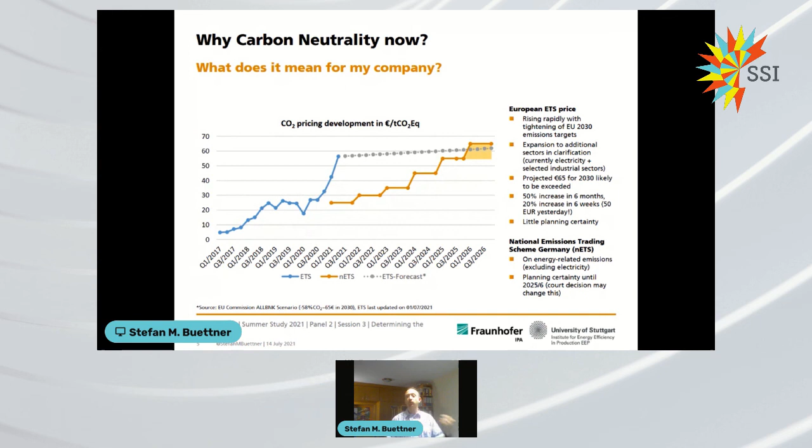Which means that there may be an overshoot in demand, increasing prices. So there are a number of reasons why it's difficult to find the ideal mix and to be quick enough before there are external supply shocks or price shocks.

In order to find out how companies at the moment find their ideal mix of measures, we have applied a methodology consisting of 3 different components. One is in-depth interviews with the companies that we work with on a one-on-one basis to help decarbonize them. Another one is literature review, so scanning announcements from press, media, company press releases, etc.

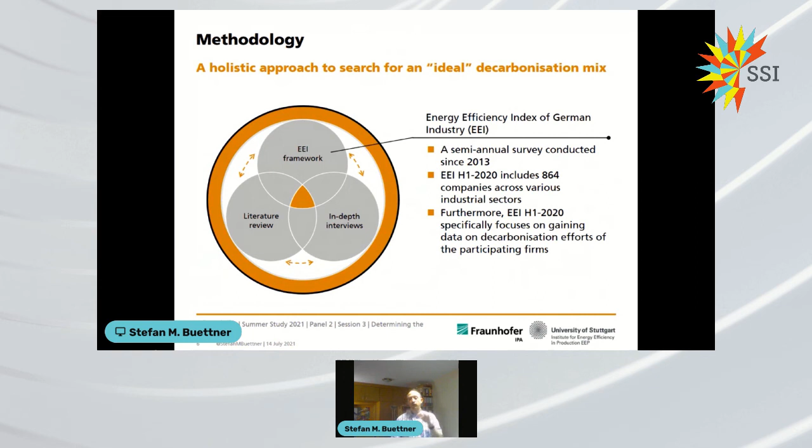And then validate our gut feelings, our experience on the broad basis by putting out a questionnaire to about 1,000 manufacturing companies within Germany, but we'll see later on not only there. On that instance, on that question, we have reached out successfully to 864 companies, and we asked them the question: if you want to be decarbonized, which factors are most decisive in making up your choice?

Is it the level of investment that plays the biggest role? Because things can be rather pricey, and if you don't have enough investment cash on the side or difficulty getting loans, maybe that is a limiting factor.

Or is it the image effects? I want to be seen as a company that moves forward boldly, and therefore has lots of emphasis on things that can be seen and noticed.

Or is it, how do I get it done cheapest per ton of avoided CO2 equivalent? Or maybe it's also the expected productivity increase, and not only energy productivity, productivity overall. But it could also be, the more complex a production is, that technical aspects are the limiting or motivating factor. How complex is it, how deep does it go into my process? Are there risks to disrupt my production? Or is it simply the availability of competent personnel that can help me implement it?

As we assume that the situation differs quite broadly depending on which company size we have to deal with, or how energy intense a company is, or what sector they're in, we cross-referenced this question against a number of different dimensions and also against the dimension of motivation. In that questionnaire we asked lots of other decarbonization-related questions, but these are not the focus of today. The data was gathered in conjunction with a number of partners from within the country, including the German Energy Agency and the Federation of German Industry.

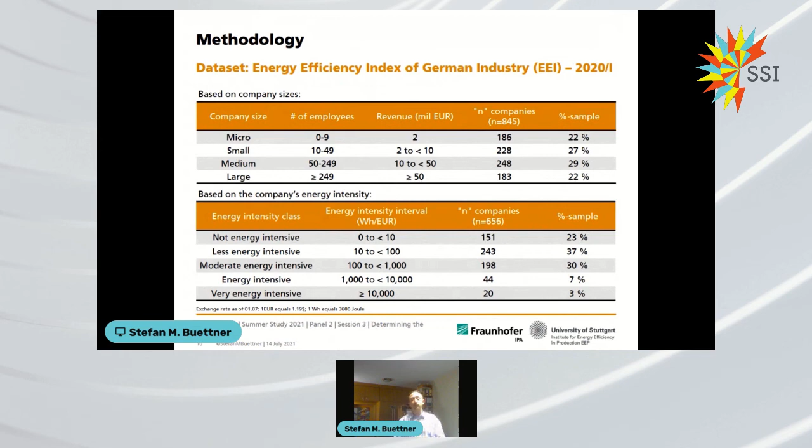Now, looking at the general result for the sample, we notice that surprisingly the soft factors are lagging tremendously behind. So at the top we have the cost factors, the cost per avoided ton of CO2, and the level of investment. Then we have technical aspects, and then the productivity increases.

Now we see 3 colors here, priority 1, 2, and 3. We asked them to name their first priority, their second priority, and then their third priority. They didn't have to give us a second or third, only the first was mandatory. So we looked at what was the number 1 priority, and then also at what was sticking out as secondary or tertiary, and overall as a priority.

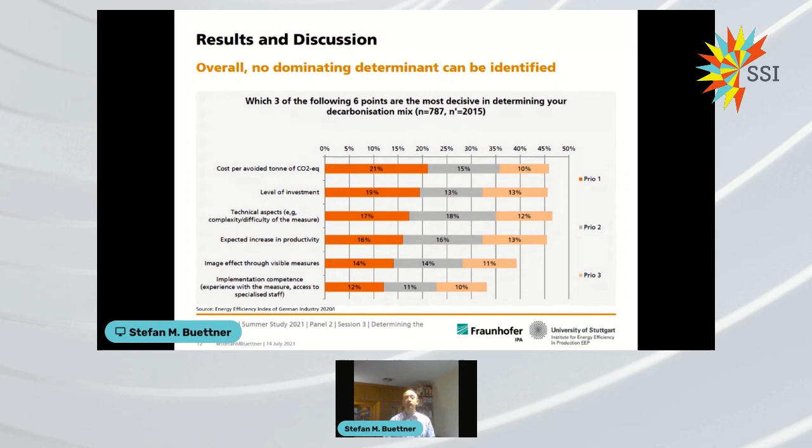We see that even though financial aspects come first as the top priority, productivity and technical aspects come in second place, because that's very important. If it doesn't increase your productivity, should you really do it? Or if it's technically troublesome, would you really want to go into that? However, in overall priority, the first three priorities added up, we see that financial factors, technical aspects, and expected productivity increases are all on the same overall level. Competence appears to be less important because nowadays you can hire that in rather easily.

Looking at this from company size, and because I would otherwise have to combine 6 or 7 charts in one slide, which would be hard to digest, I only illustrate the top 2 listed number 1 priorities and the top 2 listed aggregate priorities. On the left-hand side, under the heading General, you see a recap of the initial slide on the general sample. What sticks out here is that the number 1 and number 2 priorities differ depending on company size.

Surprisingly, the relative avoidance costs are the number 1 first priority for micro companies, even though one would assume those typically have a lower investment budget and therefore more difficulties putting up the upfront cost for an intervention. One would have thought the level of investment would be the issue, not the avoidance cost, as the number 1 thing. We see a similarity between small companies and large companies on the right-hand side, having the same order, but with a couple of percentage points apart from one another.

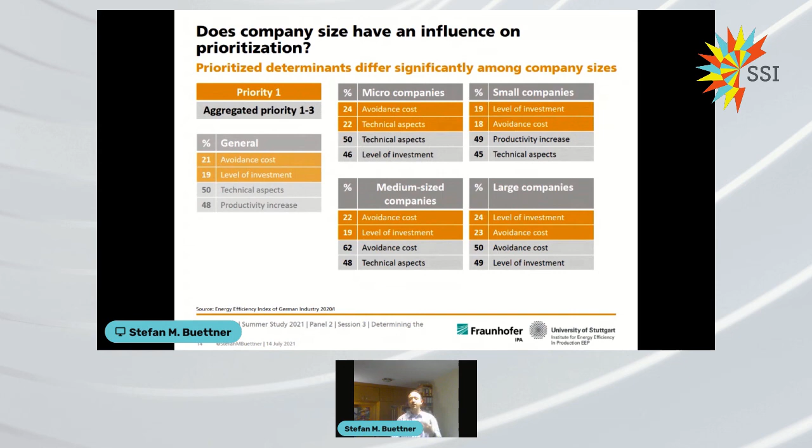Technical aspects are, however, the most important determinant for quite a number of those company sizes when we look at overall importance. So for micro companies, it's nearly half of companies. Also for medium-sized companies it's rather important, but we see they differ largely across the sizes.

Here I pick out this implementation competence element. It's a priority for less than a quarter of companies of the micro size, perhaps because they're just used to hiring in expertise, since they're so tiny that having in-house expertise isn't feasible for them. Also, it may be a consequence of companies thoroughly assessing the technical aspects, where too complex solutions requiring specific competencies are ruled out beforehand.

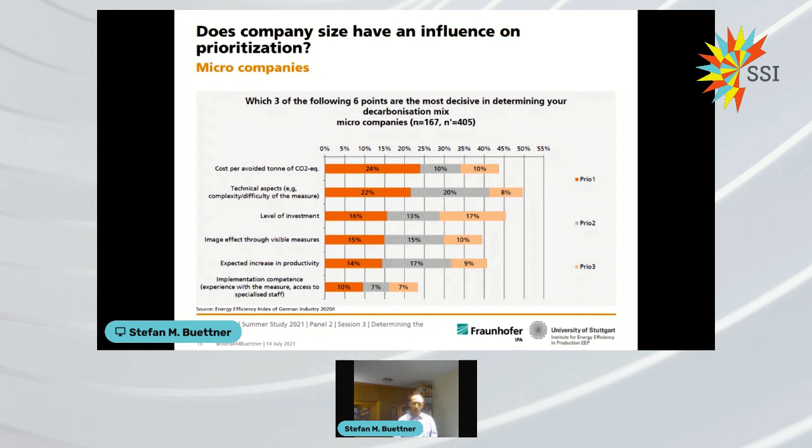Also here we see huge differences, and not surprisingly, it's the energy intensive companies that rank technical aspects first. Imagine a steel process where you'd have to change lots and lots of things to convert it to zero carbon - for example, the traditional process to steel production with green hydrogen.

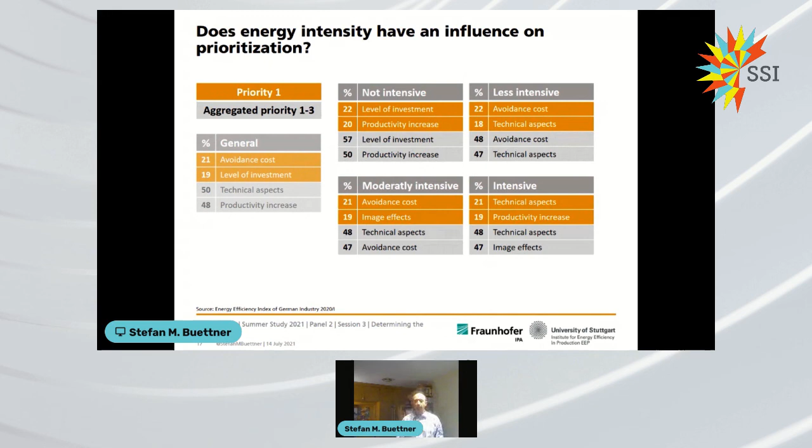Now looking at the different sectors, we classify 27 different manufacturing sectors. Because there are so many, we change the way we present that. On the top in orange, you see the branches or sectors that most often ranked that category as the number 1 priority. In gray, you see those sectors with the biggest aggregate share for this dimension. So the expected increase in productivity is most often the top priority in the food industry, followed by the chemical and chemical products industry, and for that sector it also has the highest overall importance. The chemical industry also has the largest process emissions to deal with, and where the products are rather difficult.

If we look at image, pharmaceutical products and non-metallic mineral product sectors put the highest emphasis on image effects - not the highest within that sector, but across all sectors, they most often mention it as first priority. If you look at overall priority, more than half of companies, again in the pharmaceutical industry, see that as an important factor, followed by the paper and paper product sector.

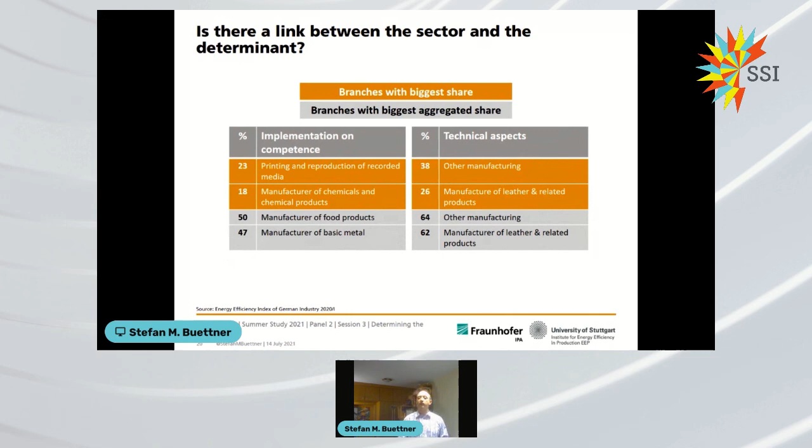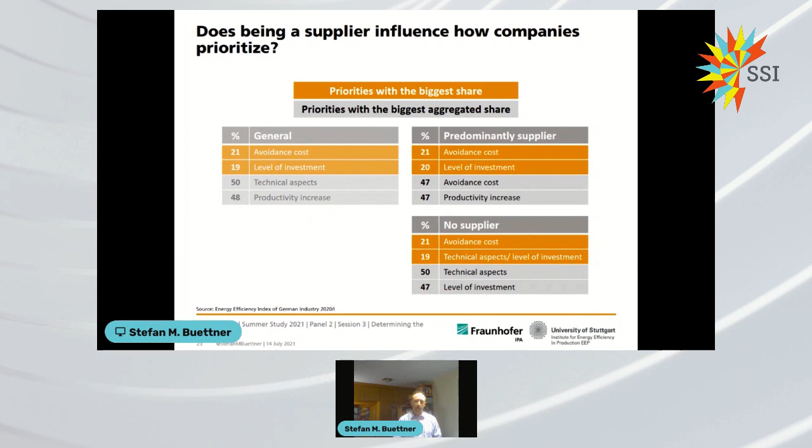When we look at the motivation to decarbonize, there are some surprising results - is it customer requirements, government requirements, or image? There are a number of different dimensions here, and I'll click through rather quickly; you'll get that afterward, I assume. CSR, corporate social responsibility, plays a rather large role. However, it's surprising that relative avoidance costs are the highest factor there, not image. On the other hand, for companies motivated by image, the avoidance costs - how do I get my image cheapest - is the driving force, as we can see here.

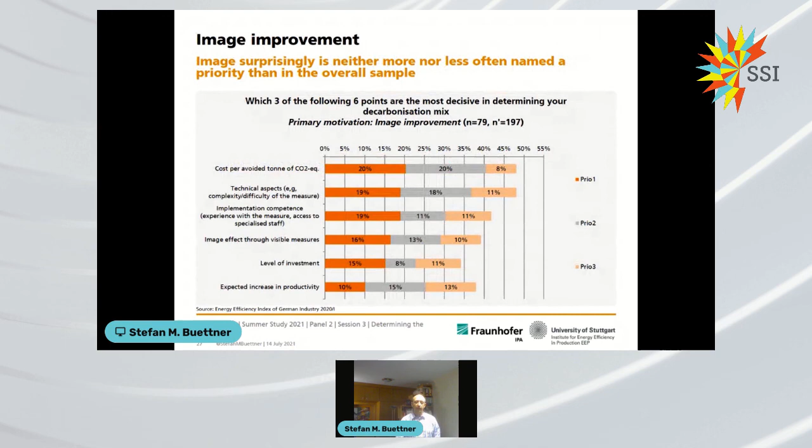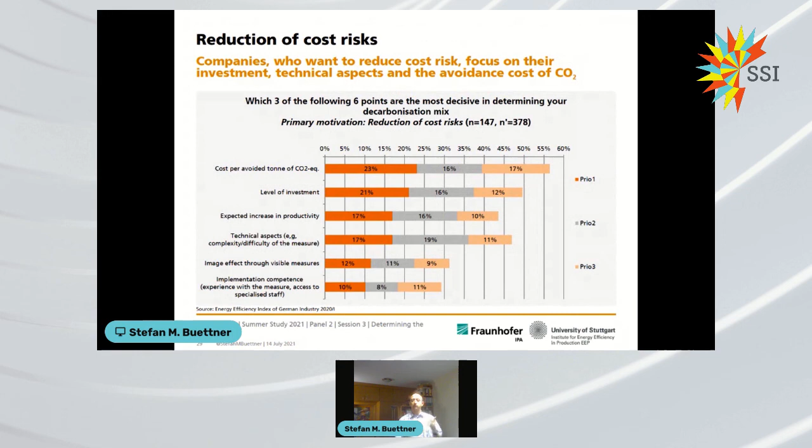That I already said, so the reduction of cost risks is an important thing, as are the long-term economic advantages. So if we summarize all that,

what influences the motivation to decarbonize? The reduction of cost risks is a very important one. Customer requirements are for the level of investment, long-term expectations, productivity increases, and CSR context for image effects. Putting that all together, there are 4 determinants that were most frequently named decisive in determining the mix, which is

the relative costs, level of investment, technical aspects, and expected productivity increases. However, external factors drive that big time. It's the current economy, available financial and stimulus systems, or also the emissions price.

There is no standard package to deliver that. And what also needs to be said, that is a snapshot of the situation in Germany. However, that said, we do capture that data also for other geographies. So the same questions are currently being asked in the US, in Canada, in Mexico, and many other countries. So if you're interested, just go on that link and fill in the questionnaire. Many thanks.

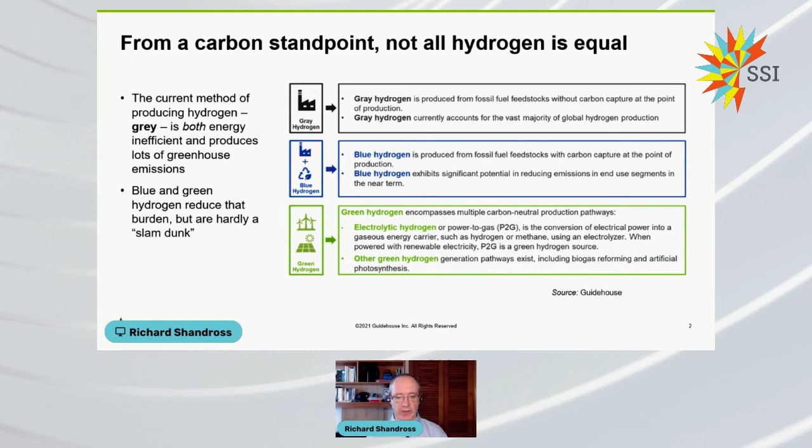So let's take a look at the opportunities for decarbonization that exist within industry right now. This is the US industry data reported by the Manufacturing Energy Consumption Survey that the Energy Information Administration does. The blue shaded areas are electric fuel consumption, and fossil fuel is that rusty color.

You can see that about 60 to 63%, or 62%, of the entire industrial energy usage takes place in boilers and process heating. Much of boilers can be electrified. One issue, which I believe Stefan referenced, is it would require a large increase in electrical capacity. And it's especially hard for retrofits, where you would have to take a good boiler and just replace it with an electric boiler.

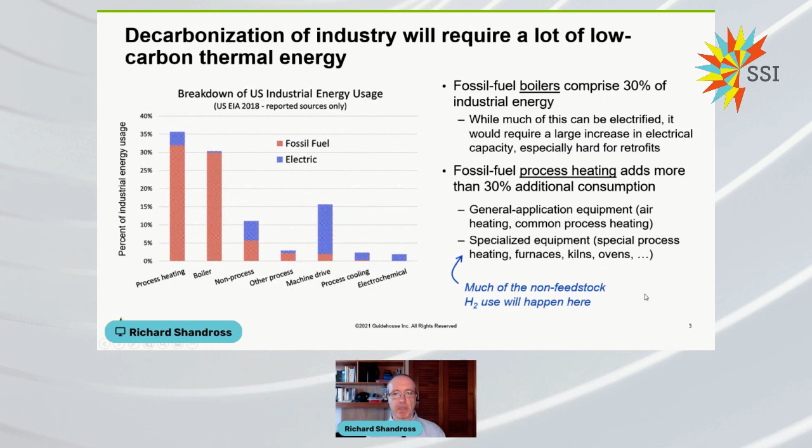On the process heating side, you have more of the hard to electrify kind of fossil fuel usage. You can divide process heating into general application equipment such as air heaters or common types of process heating, and more specialized equipment such as kilns, special process heating that is very customized, furnaces, ovens, and so forth. That's where a lot of the non-feedstock hydrogen use in industry is going to happen, in that high temperature specialized equipment that is hard to electrify.

So what are all the different kinds of use cases for low carbon hydrogen in industry? Hydrogen is already used quite a bit in industry as a feedstock, and if you can green it by introducing low carbon hydrogen, that is a very good start for decarbonization. You can't electrify to replace that hydrogen, and there's no label on the atoms and molecules saying that it's green. So essentially, just greening it adds decarbonization without much competing opportunity.

The other major uses are as a fuel, which is not really much of a use right now, except to some extent, probably a significant extent, in the petrochemical industry, but not much elsewhere. As a process atmosphere, which is really important in things like glass making and especially metals processing, or as a heat transfer medium, which is a much lower volume use. So the real opportunity for new decarbonization and new uses of hydrogen would be as a fuel.

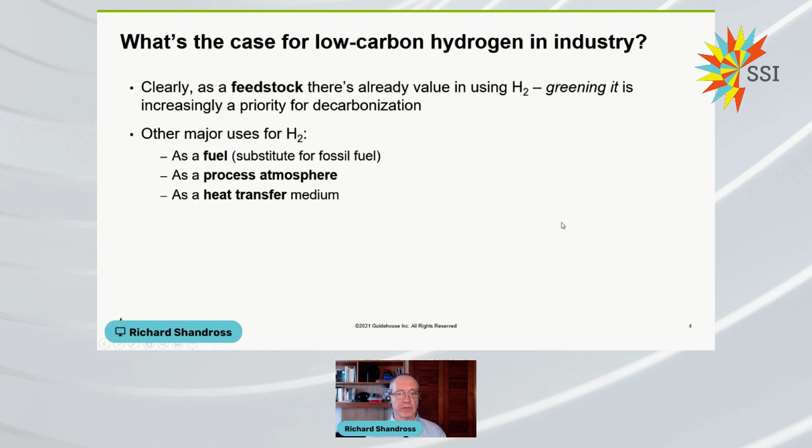So let's talk about molecules versus electrification. There are various pros and cons for each of them. The first one is that if you're producing green hydrogen by a non-bio method, you're using electricity, and there are efficiency losses, conversion losses to get to hydrogen from the water. So the baseline case would be just to use that electricity directly as electrification, and the local efficiency is good as well, because you often have more heat losses in furnaces, ovens, kilns, boilers, and so forth.

For energy storage, batteries are great for short-term, as in a day or less. But when you're talking about medium or long-term, that's where hydrogen, and perhaps other molecules, can have an advantage. In terms of cost, you've got costs involved in equipment, R&D to get equipment to replace existing equipment that is not electrified right now. You've got infrastructure, both for electrification, as I referenced, and also for hydrogen. We'll get into some of that.

In the case of electrification, if you're in a region where peak demand pricing is in effect, unless there's a special industrial version of that, you could have a real problem using so much electricity on that worst day of the year. In terms of compatibility with industrial processes, electrification, at least currently, generally requires low to medium temperatures, and by medium, that could be fairly high, up to 700 or 800 degrees Celsius.

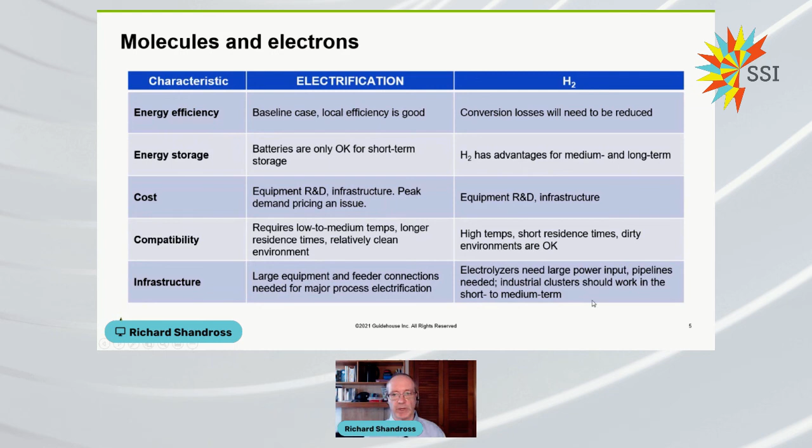In terms of infrastructure, you're talking about potentially large equipment and feeder connections for electrification. That is also true for electrolyzers. If you had on-site electrolyzers, you'd be losing energy in the electrolysis. So pipelines really are the way to get around that, where you have the good infrastructure to begin with: you produce the hydrogen, then pipe it elsewhere. In the meantime, industrial clusters were a sort of local centralized source of hydrogen.

I'm looking at the time. I'm already taking up a bunch of time here, so I'm going to not go through all of these, but there are a lot of technical challenges to getting to some of these high temperature industrial processes that use hydrogen instead of natural gas.

The reference point you should use is natural gas as opposed to electrification. When you compare heat transfer from a hydrogen flame versus a natural gas flame, you've got much less radiation from a hydrogen flame. So there has to be methods to increase that, or to reduce the need to transfer heat by radiative heat. You've got a higher temperature in your flame, so NOx emissions are higher.

That is an issue and something that needs to be accommodated. Possibly, if you were burning pure oxygen, if you needed really high temperatures and flame intensity, burning with oxygen, then that's not so much of a factor.

The burning and combustion characteristics for hydrogen are very different than natural gas. So the burners have to be designed appropriately, and the control systems and gas flow systems have to be designed appropriately. What you're ending up with is a much wetter flue gas, which may, if there's contact with the product, create issues - having a much wetter gas, as well as wetness in the combustion chamber and exhaust gas, which can create issues there.

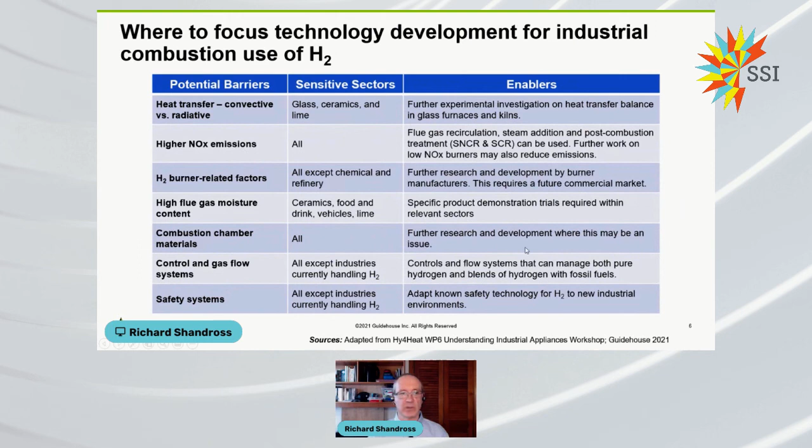All this is being researched for some industries and will be researched for others. Glass is one that's starting to make progress on its own volition. And safety systems - obviously we know hydrogen has its own safety issues that are different from natural gas, and they're important.

Producing green hydrogen via electrolysis does have energy efficiency implications, but I should point out that for thermal applications, they're less than what people currently are thinking. Part of the reason is because when you're thinking of the energy content of your gas in a combustion application, you're looking at the higher heating value, as opposed to the lower heating value, which is what you think about for power applications.

Current modern day electrolyzers can reach pretty high efficiency - just at the electrolysis, you can get to 93% higher heating value. Now there's also other balance of plant, like power rectification, and you may need power rectification and electrification in certain industrial processes as well. Where you're really going to get a big ding is if you need compressed hydrogen, because that can use a really significant amount of additional energy.

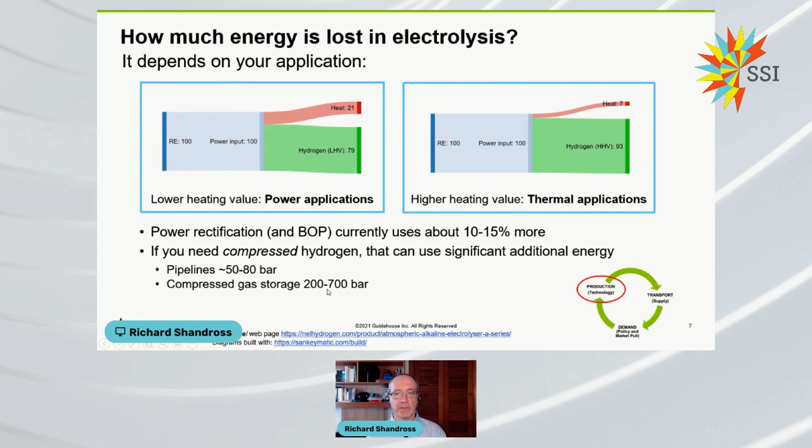Some of that energy you need if you're going to do pipelines. If you're going to be storing on site, you need to really compress it quite a bit, and you can lose a lot of energy.

Yet costly, especially if you're going to try to capture all the carbon. Electrolysis, as I mentioned, in terms of efficiency and so forth. The energy costs of compression and liquefaction are not negligible. Transport - there are not too many hydrogen pipelines, only in certain places. It's possible to do some gas blending, but that has its own issues. I'll be talking about that in a slide or two.

Then there's the question of storing it on site, if you don't have hydrogen pipelines sufficient to give you a constant stream, or if you're trying to store it long-term - a lot of the above-ground storage options are not terrific. So geological storage is a question, and that needs a lot more research and development for certain kinds of storage. You may not have the underground formations in your area that are known to be good, but you may have some that might work, and there needs to be further research.

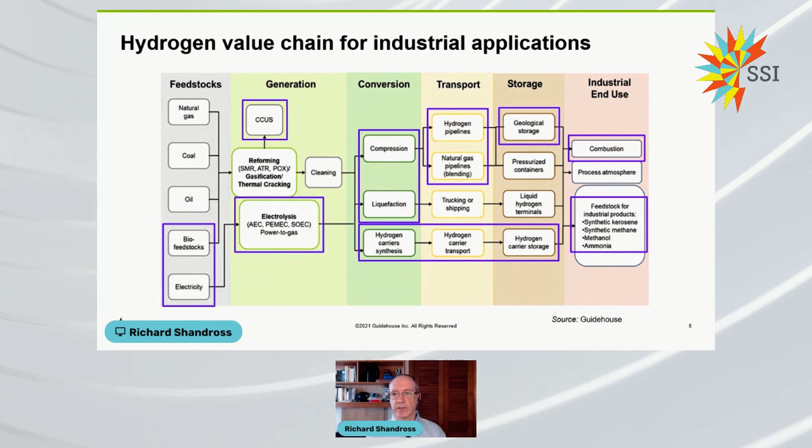The devices involved in doing the combustion need to be developed to be compatible with hydrogen or blends. And then finally, if you're going to make industrial synthetic products, you need to get those low cost and highly efficient, and in some cases you might need them distributed to make it make most sense in terms of where the renewable energy resources are.

So with all this stuff, there are some barriers, challenges, if you will. What we believe is going to happen, hydrogen is not the answer to everything. Nobody is thinking that, or very few people are thinking that. And if anybody in the audience is thinking it, really it's got its place. It's going to be side by side with electrification, methanation, energy carriers, and all sorts of other things.

But in order to ameliorate some of these challenges that I've talked about, we're proposing that there's a virtuous cycle involved. And as you go around this circle more and more, the difficulties are going to get less and less.

Right now, there's not a lot of demand for green hydrogen. As there's more demand, there'll be more incentivization of all parts of the value chain to get more efficient, to get more cost effective. It might be, and as Stefan mentioned, in Europe it's already happening, that you need policy drivers and incentives such as a cost of carbon in order to really get that demand up. That may be what it takes.

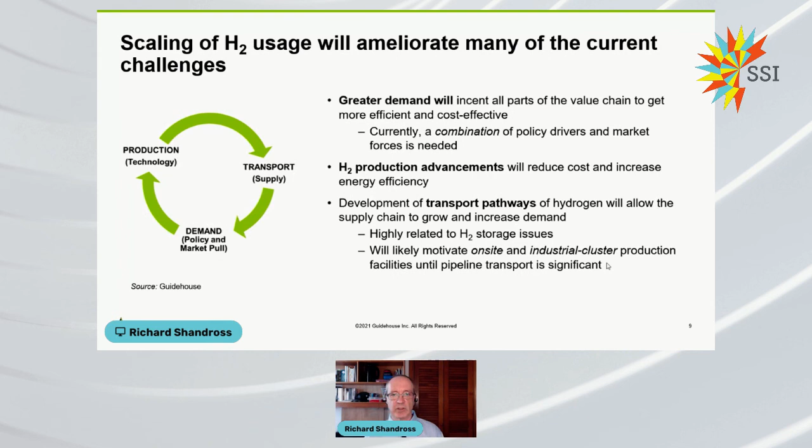And you have to get those transport pathways. That will be a big bottleneck. If you have to truck it, it's a very low energy density on a volumetric basis. So you need pipelines and so forth. In the meantime, there will probably be some on-site and industrial cluster production that is a starter for it.

So here's the challenge with storage. Basically, on a volumetric basis, hydrogen is a light molecule. It doesn't have many kilograms per cubic meter under normal standard conditions, so you have to really compress it to 200 bar, and then you'd get 13.3 times the volume for a given energy density compared to diesel fuel. If you convert it to ammonia, you're only talking about 60% more than diesel. Then there are other storage methods: liquefaction storage and metal hydrides, and conversions into other energy carriers. Because of this, for large amounts of hydrogen, geological storage seems to be the most feasible avenue for large-scale storage.

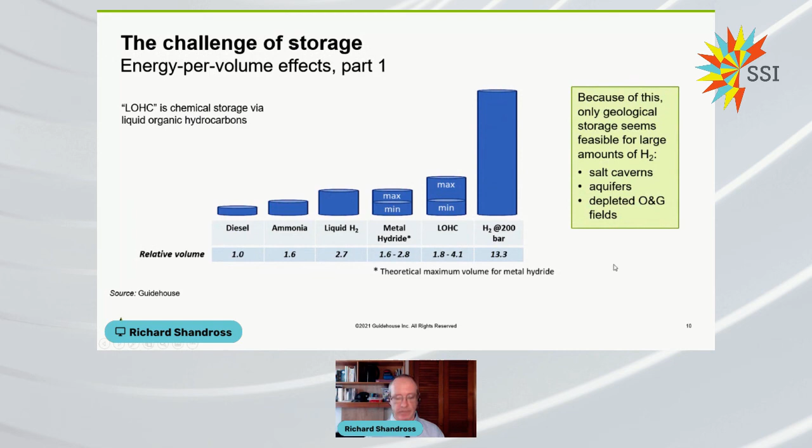So if you're not going to store it and you need to get it to your industrial site, ideally you'd want to send it via pipelines. Tube trucks and so forth are not going to be great except for small uses, like maybe atmospheres in a small plant or something like that.

There are two basic options: you can blend it with natural gas into existing pipelines, or you can do something so that you can put pure hydrogen in the pipelines, either upgrading existing pipelines or creating new pipelines for pure hydrogen. Hydrogen can be blended with natural gas into existing pipelines with not much equipment modification at all, but the problem is it also has a minimal impact on decarbonization. I should also mention that for those who want pure hydrogen on the other end, there are technologies being developed to purify it via membranes on the offtake side.

So you can transport it and have it as pure hydrogen or close to pure hydrogen on the offtake side. The greater your concentration of hydrogen with natural gas, the more you need accommodations to the existing gas network.

You've got compressors, some of which don't exist for large volumes, and in any case have to be retrofit for smaller volumes. You've got to deal with leaks. It's a leakier gas because of its diffusion, embrittlement of the pipelines, different safety issues, cost, and so forth. And you have to pressurize it more because per unit volume, you're delivering less energy.

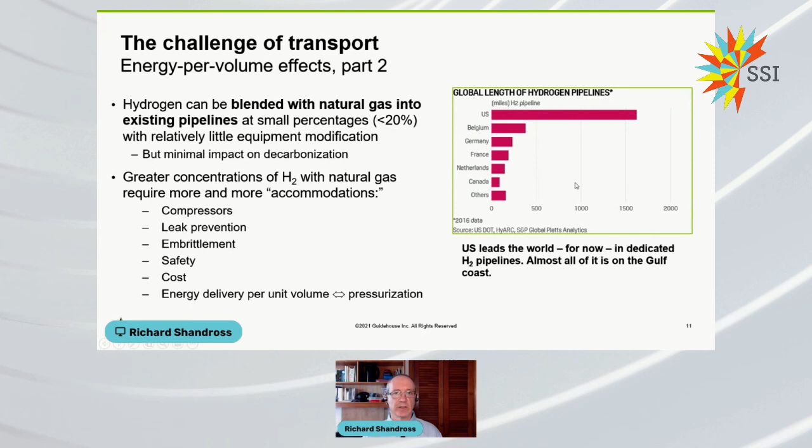And that's not going to be the case much in the future, because in Europe, the gas networks, and Guidehouse has been working with these gas networks in terms of helping to develop this vision and do analyses and produce the reports on it. In Europe, they realized this problem with being able to get the hydrogen to the various places people are going to want to use it.

So something like 25,000 miles by 2040 are envisioned with this consortium of gas network providers, both repurposed pipelines, which would be about two-thirds of the capacity, and then newly constructed ones. I think in Europe there's a lot of the smaller kind, much less so in the United States, but the average size of the pipes are going to be increased as well.

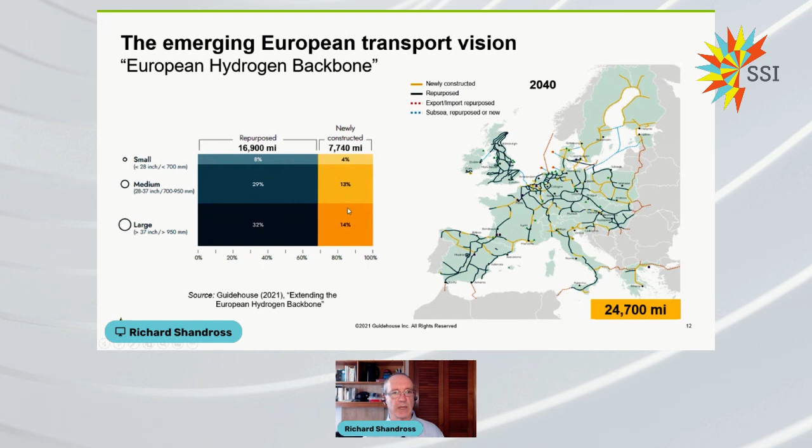So this is a vision for the future going to 2040 and beyond. On the production side in Europe, we're talking about a lot of electrolyzer plant steel that's going in the ground over the next 5 to 10 years. We're not even talking 10 to 20 years. We're talking very quickly, like 10 million tons per year to be produced by 2030, 1 million tons of hydrogen per year by 2024. Many large projects over 100 megawatts electrical into the electrolyzer have been announced.

Just in Germany and Netherlands, we're talking about a total of 87 different projects. They're not all electrolyzers, but pipeline and electrolyzer in combination, quite a few projects, big names in the chemical and utilities industry. And you can see here where all the electrolyzers going in the steel is going in the ground.

Okay, so let's say we talk about the capital, that you can transport it, you don't have to store it so much, or you have big salt caverns or something like that to store it, and the prices of the capital equipment for electrolysis are going to go down. But what does that mean in terms of the cost of hydrogen?

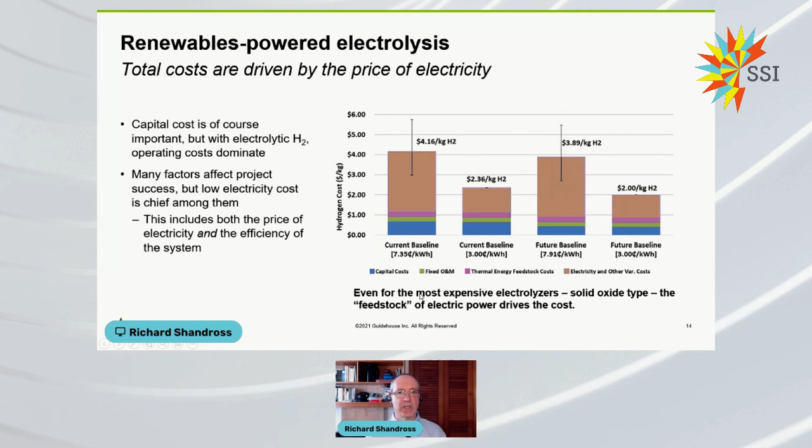So anything that increases efficiency, anything that reduces the price of electricity, having a price on carbon, again, is probably going to be a key factor as well. There are other factors that would make hydrogen strategically better for specific sites, including the need to store energy on local sites, the need or the ability to produce synthetic chemicals with what you're making. There's a lot of things where you can get more value out of it than just what you would get by burning it. So it's not that no hydrogen will be used at these higher prices, but we really want to get it down to much less than what it is right now.

So looking at the whole virtuous cycle, what is happening when you look at the whole picture, big initiatives to reduce the price. HyDeal in Los Angeles is trying to get the price of green hydrogen down to $1.50 per kilogram by 2030. A new initiative, the federal Earthshot initiative, to get the price of hydrogen down to $1 a kilogram. So these things will help to increase demand.

There's research and development being done for large vehicles, for various industries such as glass making, even potentially cement kilns or pre-calciners in cement kiln areas, metal heat treating like crazy. So the demand work is starting and is being done on that side.

And then on the transportation and production side, you've got a lot of steel going in the ground, a lot of pipes planned and so forth. So at least in Europe, we're seeing this is really going to reach a critical mass. And there's no reason to think that once things are worked out and the technologies are worked out to be really competitive with electrolysis, really cost effective and so forth, that wouldn't get transferred over to the United States.

As I mentioned, some cost reduction and demand initiatives are already taking place in the United States. So the basic punchline really to the whole thing is it's not here yet. It's a piece of the puzzle, but I think people need to start taking it seriously and start paying attention really to the development within your own industry or any industry that you're concerned with. And that's basically it. I look forward to hearing your questions after all the presentations.

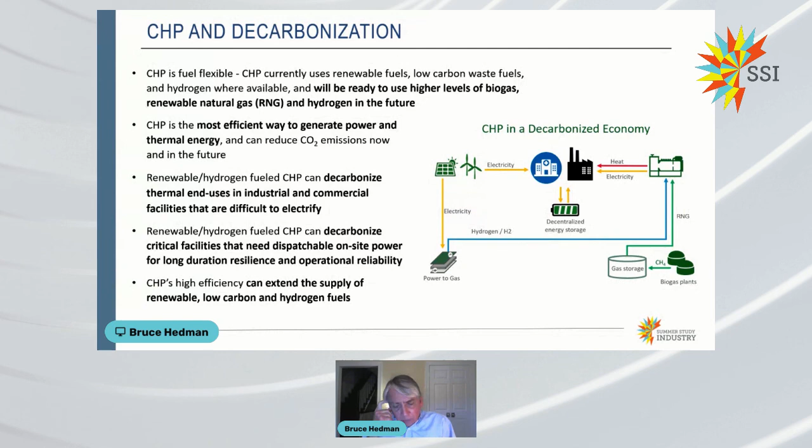Finally, we believe that CHP's high efficiency can extend the supply of renewable and low carbon fuels such as hydrogen, which will be initially limited in availability and expensive. So my next 10 slides or so are really just to highlight a couple points that support these conclusions, I hope. First, I'm going to start with, to set the stage, the role of CHP in the US today.

There's just shy of 81 gigawatts of existing CHP currently installed at more than 4,600 facilities. 82% of this existing CHP is in industrial applications. The 81 gigawatts represent about 7% of total US generating capacity. And we estimate it currently saves about 1.7 quads of fuel and over 200 million tons of CO2 annually.

As I just mentioned, CHP is fuel flexible. While the bulk of current CHP capacity is fueled by natural gas, 72%, there's significant use of non-fossil fuels such as biomass, biogas, municipal and process waste, where they are available and cost effective. In fact, over the last 10 years, 25% of the installed CHP capacity has been in zero carbon fuels, not fossil fuels.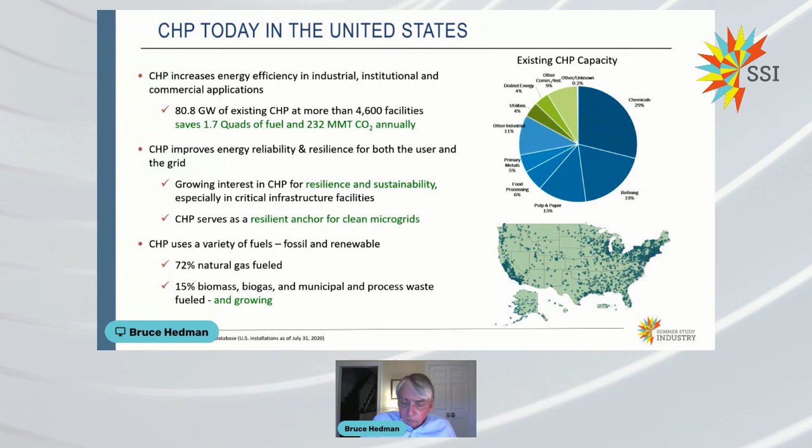Just to follow up on fuel flexibility, if you look at CHP in the industrial sector—and this is a broad definition of industry, it includes manufacturing, agriculture, mining, oil and gas, water treatment, things like that—currently 15% of existing industrial capacity is fueled by non-fossil fuels, such as biomass, biogas, and waste heat, driven again by availability and reasonable price, including cleanup.

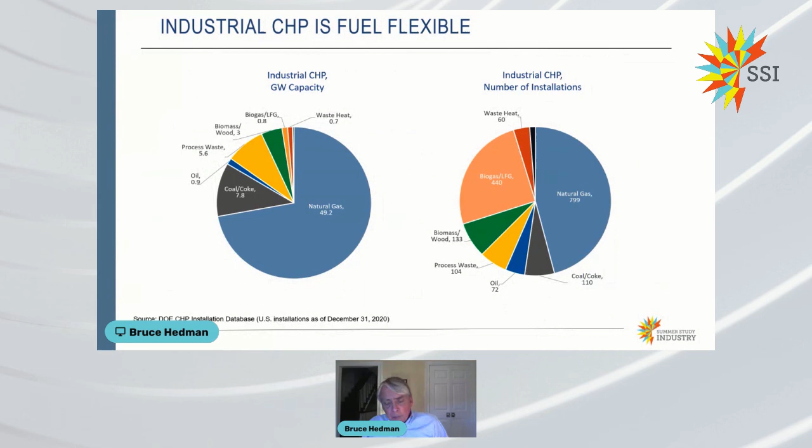But note that this 15% of non-fossil capacity actually represents 44% of the number of existing industrial CHP installations. There's about 1,700, I believe, that are out there. So there's an enormous track record and experience base for operating CHP on renewable and other non-fossil fuels by both industrial end users and by CHP suppliers. I think that's an important item to remember.

I mentioned earlier that CHP is the most efficient way to generate power and thermal energy, and as such it does provide significant CO2 emissions reductions and fuel savings today. We believe it will in the future too, wherever marginal grid generation is based on a combustion technology, whether that marginal fuel is natural gas, biogas, or some carbon zero fuel such as green hydrogen.

Don't worry, I'm not going to go through all the numbers here. You can review the details when the slides are posted—it'll also have my contact information. I'd be happy to discuss the details with anyone offline.

It's based on assuming a 90% load factor and typical electric and steam output for a CHP system of this size. That's pretty typical of an industrial CHP system.

The steam from the CHP system displaces an 80% efficient natural gas boiler and displaces marginal grid generation, which in this case is estimated using EPA's 2019 National Uniform Energy Efficiency Factor from the AVERT system, meant to be a first-cut estimate of marginal grid emissions. You can do it either on a national basis or a regional basis.

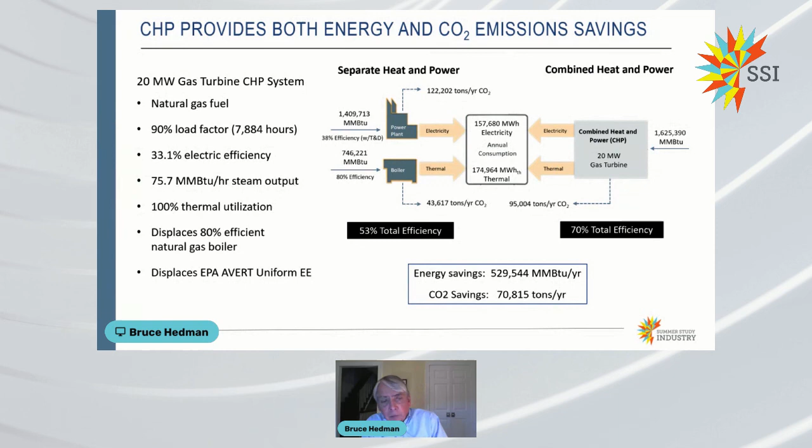It's on the order of, and actually a little bit larger than, the annual CO2 savings from renewable technologies such as solar PV and wind. The reason for this is the high annual capacity factor of CHP.

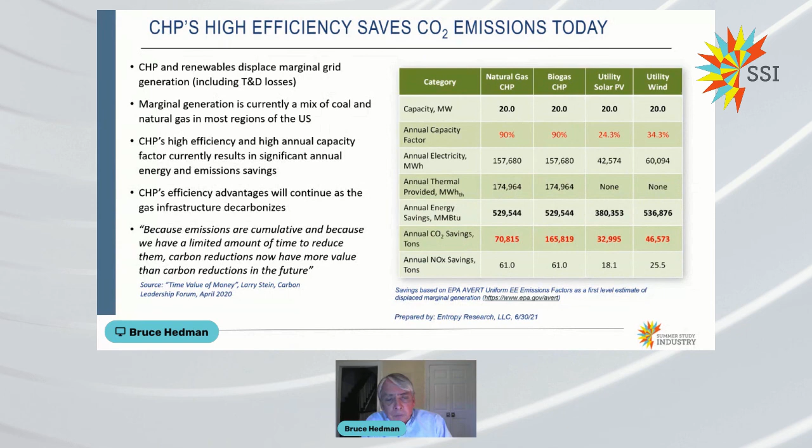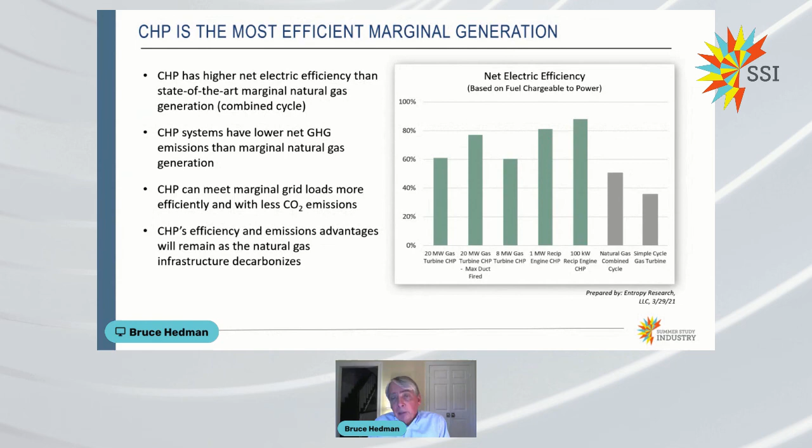Another demonstration of this is that we included in our paper a look at how, while economy-wide electrification and decarbonization of electric generation is being pursued aggressively in many states and cities, fossil fuels and natural gas specifically are likely to remain the marginal generation resource for the near and midterm, and may be necessary over the longer term in some regions to support the greater integration of renewable resources and provide grid regulation services.

I think how much and whether these kind of combustion marginal resources will be natural gas, hydrogen, or renewable natural gas certainly is in question, and we'll see where that goes.

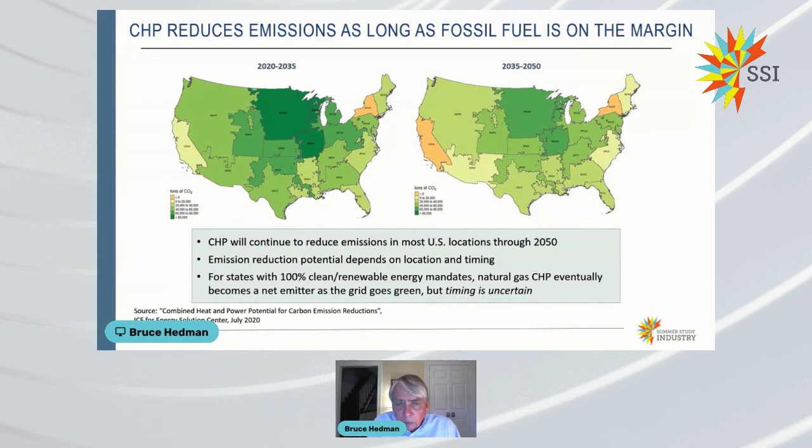So personally, I don't think putting in natural gas CHP today is the road to a stranded asset. It will continue to save emissions for a long time, as long as natural gas is on the margin at the grid. And then hearkening back to what Richard was talking about, there is a path to no-carbon CHP through hydrogen, and that really is this slide.

So natural gas CHP can be a tool to produce significant CO2 reductions in the near to midterm. And the question does remain, what's the long-term role of CHP in decarbonization?

Again, we think there is a key role moving forward, particularly in using low to no carbon fuels such as hydrogen to produce efficient, reliable energy services to markets and processes that don't lend themselves easily or cost-effectively to electrification.

And we feel that these are all paths to the use of CHP as a long-term solution to decarbonization. Current CHP projects routinely operate on biogas and hydrogen blends, and all major gas turbine and engine manufacturers are introducing 100% hydrogen capability systems, many looking at 2030 as the point for commercial availability.

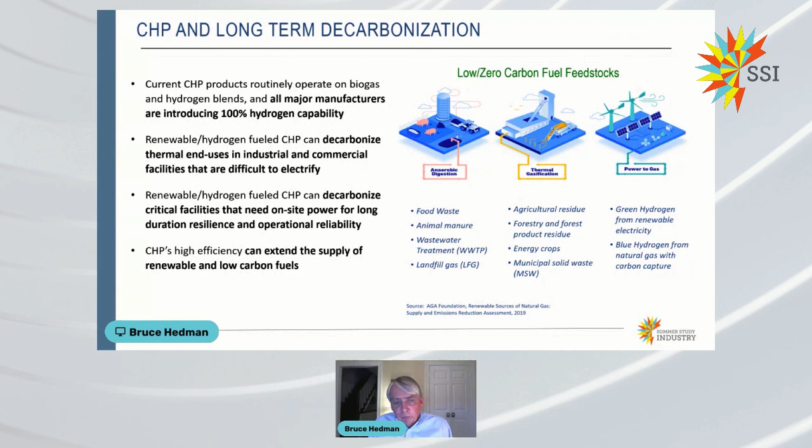Just to go a little bit deeper, obviously the question is how large is the potential resource base for RNG and hydrogen and these alternative fuels? I think work in this area is just starting to accelerate in the U.S., and there aren't a lot of specific estimates out there yet.

Taking the American Gas Association work from 2019 as a start, the study considered three scenarios: a low resource, a high resource, and an overall technical potential for renewable natural gas. Looking at the comparison on the graph, the high resource scenario estimated a supply of around 4,500 trillion BTUs per year of RNG at a cost competitive with other carbon abatement options, between $55 and $300 a ton of CO2 emissions reductions.

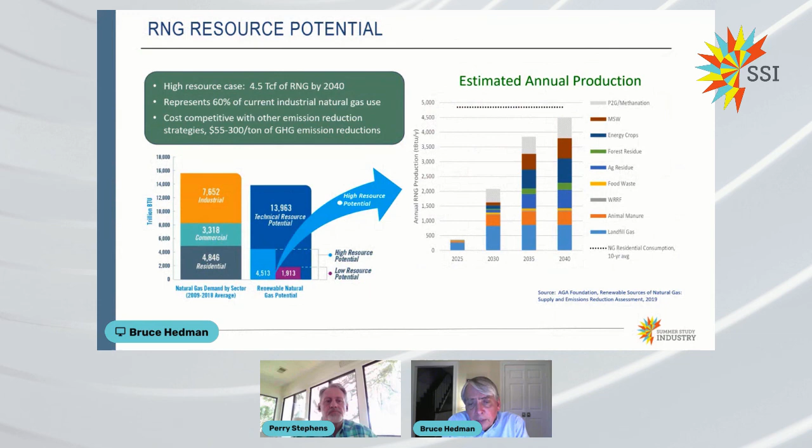This 4,500 trillion BTU is nearly 60% of current industrial natural gas demand of a little over 7,600 trillion BTU. So we do think there's a path to a significant resource base of alternative fuels such as renewables and green hydrogen, and if you look into the long-term future, probably even more potential for hydrogen.

To support that, a World Resources Institute report released late last year compared the resource estimates for RNG from three different studies: the AGA study and some earlier studies from 2013 and 2018. My read was that they all hung together in terms of resource estimates you could identify in 2035 or 2040.

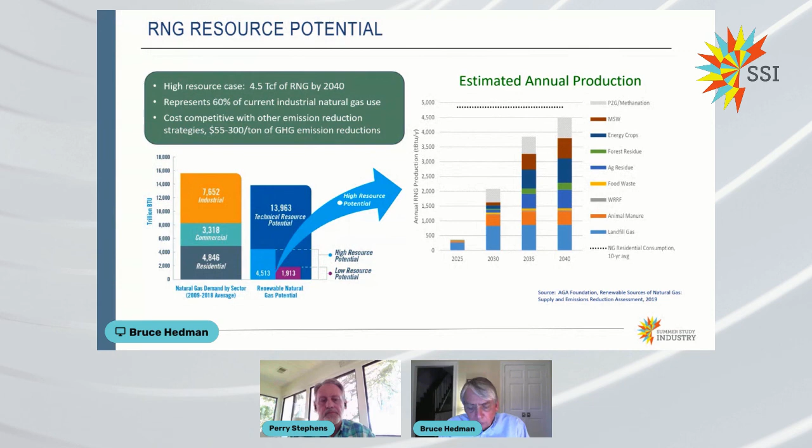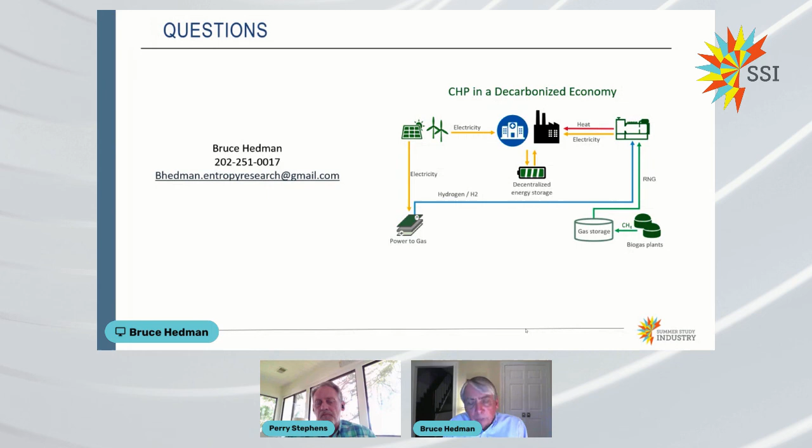With that, I will turn it back to you, Perry.

All right, thanks, Bruce. You really did fill in a lot of gaps that I had on the role of CHP going forward. We've got time for just a few questions, so I want to shoot this over to the panel. First, for Stefan, in the U.S. we see small and mid-sized businesses, in industrial codes like assembly and electronics, actually account for an awful lot of the greenhouse gas emissions, and they tend to be small, mid-sized businesses. What does your data suggest are the best strategies for motivating those businesses to think about their options for low carbon fuel and low carbon technologies, based on what you know about what motivates them?

Many thanks for that question. Indeed, small and medium-sized companies are a crucial factor. If we look at the overall number of companies, they're over 99% of all companies, at least in Europe. And in contrast to the common perception, they also have the highest share of energy-intensive companies among the mid-cap companies. So it's not the large ones that are most energy intensive, it's on average the medium-sized ones.